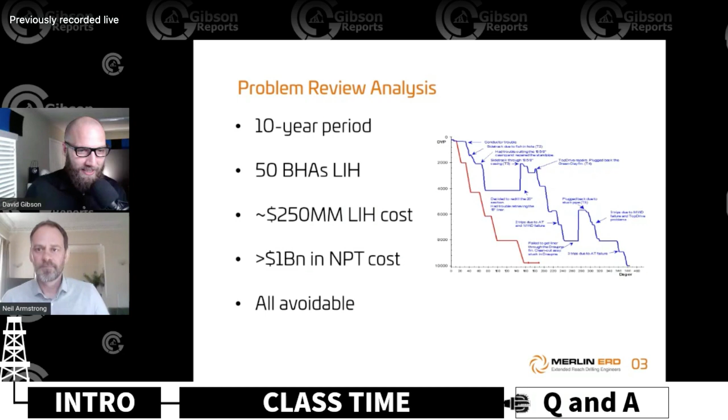Okay, so like I said, this is not an ERD presentation. However, I always feel the need to put a nose plot in all of my presentations, it's kind of tradition. But the point of this is to illustrate what's possible, because I'm going to spend the next 30 minutes talking about when things go wrong, so I'll just spend a couple minutes talking about when things go right.

10 out of the 10 longest wells in the world by measured depth have been drilled by one operator, not all in the same location, but 10 out of the 10 longest wells. One of them, which was a world record at the time back in 2012, was drilled with less than 1% NPT. It was drilled and completed in 60 days, out to 42,000 feet. All 10 of those wells are greater than 40,000 feet measured depth. So it is possible, and these are complex wells, with completions running screens out to 40,000 feet plus. So pretty complex wells. If you get it right, that's what's possible. And the success there is due to building on lessons learned and resourcing a team appropriately. They've got the equipment they need, the personnel they need, but building on lessons learned is the key thing.

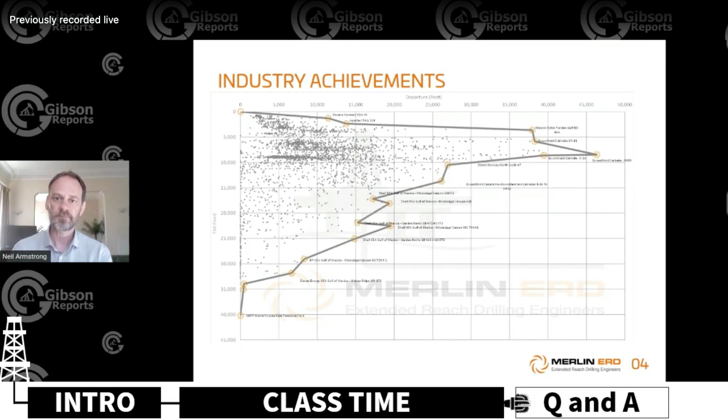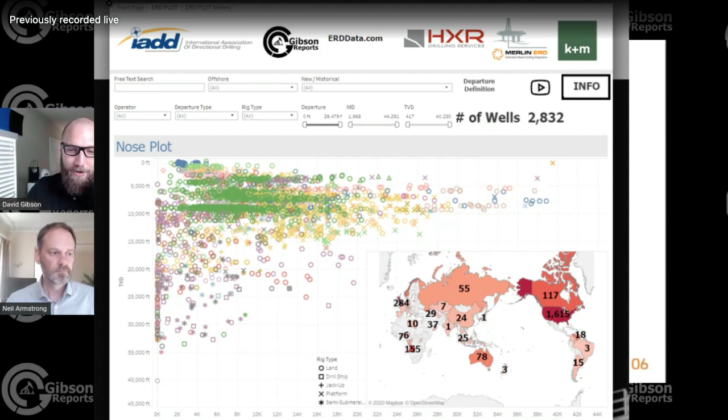There we go, great, thanks David. So that's looking pretty stable now. So let's see if it matches reality.

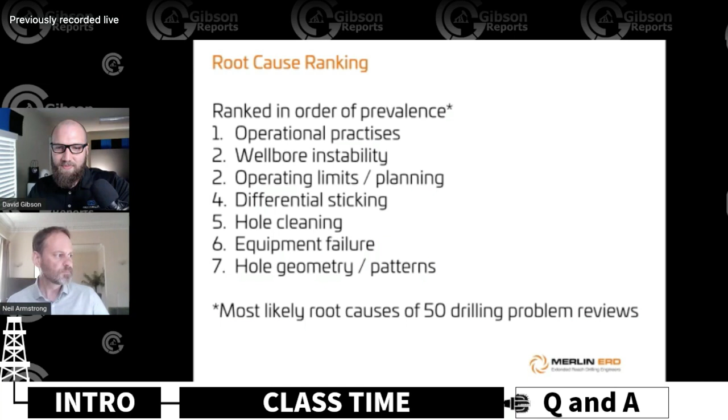Operational practices, wellbore stability, hole cleaning is a little bit higher than what we found, wellbore stability up there. And then the bottom couple, hole geometry, patterns, and equipment failure are the bottom two. So people are broadly in the ballpark there.

Quite close. So the next slide kind of shows the problem pie, how was it split up. About 29% of it was related to operational practices, and then pretty close behind, pretty much equal, wellbore stability, and then operating limits and planning and differential sticking, 17 and 15%. So there's not much in it, but regardless of how it's split, the top four were pretty clear.

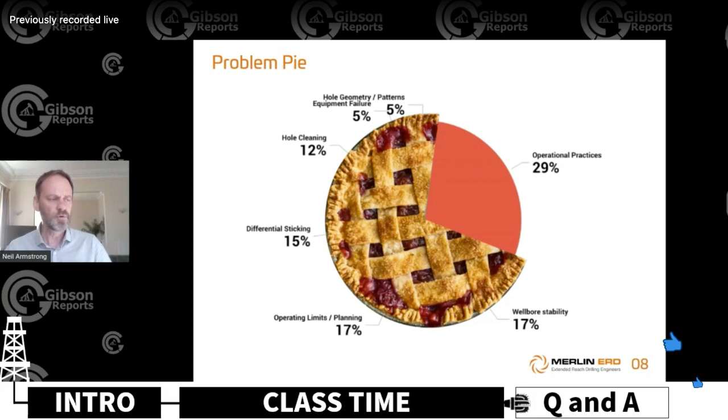So we'll go through each of these in a little bit of detail, starting with operational practices. This is top of the list because high-risk operational practices are a causal factor in many events. If you think about it, if hole cleaning's poor but your operational practices are very good, you can sometimes get away with it. If your operational practices are high risk, then you're at risk of planting a BHA.

When I'm talking about high-risk operational practices, these range from excessive stationary time on connections across a permeable zone, and it's pretty obvious what's going to happen next. Or company men obsessed with tripping to the shoe as quickly as possible without pausing to think about what has to come next, so at best he's running the same BHA back to bottom, or at worst he's got a challenging casing run coming up. No thought about conditioning the hole and cautiously coming out, it's about getting to that shoe as fast as possible.

But the analysis showed that back reaming was by far the highest risk operation. This is sort of the worst case scenario that occurred on a number of these events, whereby it was tripping out the hole, BHA pulled tight into a cuttings bed, and then pumps were just brought up and the rotary immediately went into back reaming. So that's kind of your recipe for a pack-off event, and if you're unlucky, a planted BHA.

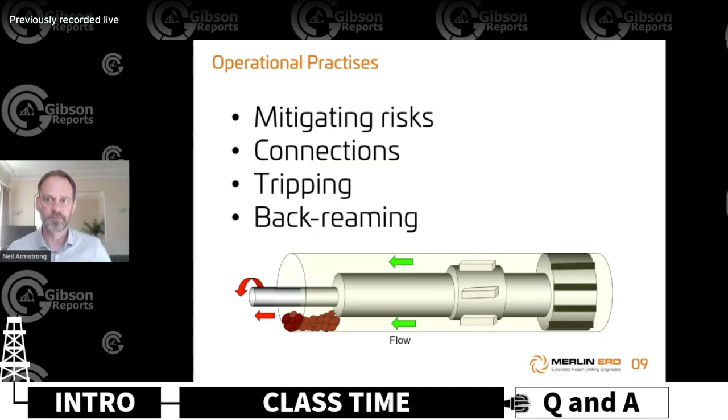But if you're getting a wellbore stability study done, chances are you know you're going to be needing oil-based mud, so the recommendation is invariably a mud weight. And often the problems we see are stability related, purely due to inadequate mud weight, and it's often just a conservative approach to managing losses. So operators are prioritizing losses over wellbore instability, and sometimes it's because fracture gradient data is inadequate.

We do occasionally see some fairly outlandish practices whereby mud weights run as low as possible to prevent invasion into fissile, pre-fractured shales. Clearly it's beneficial to avoid mud invasion into these shales, but running mud weight as low as possible doesn't help stability. Appropriate use of bridging solids is the strategy for that. That's probably one of the oddest things we've seen recently.

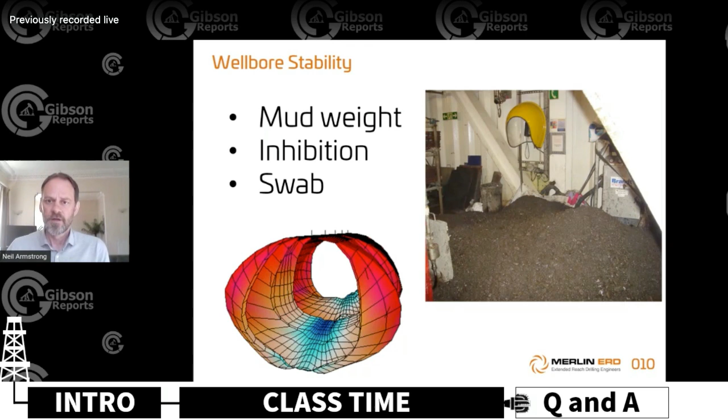A next pretty common problem we see is operating limits and poor planning from a limits and loads perspective. On high angle wells, it's critical to know what your limits are and what your loads are as accurately as possible. That involves modeling. It's surprising how often we see at the rig site drillers unaware of what their pull limits are.

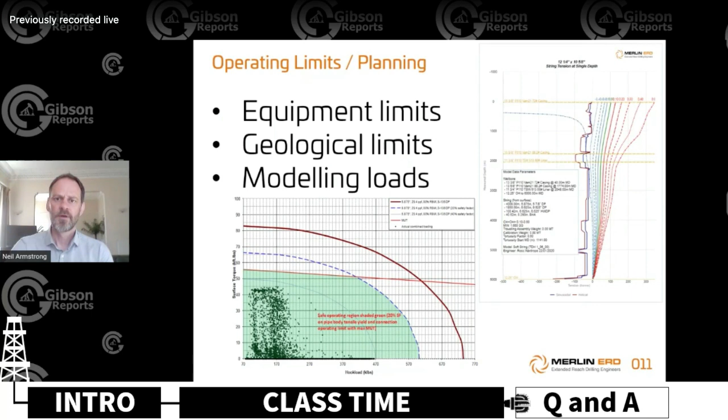Okay, so back to differential sticking. I was saying it's probably disproportionately represented in our data set because one operator had 4 lost BHAs due to differential sticking, and 7 events, but managed to recover from 3 of them. Interestingly, the difference between a $20 million NPT event - 1 lost BHA, plugging back in high angle hole, sidetracking and re-drilling, all coming to $20 million NPT - and just one line item on the daily drilling report which said 'pulled 90K over after the connection to free pipe, then reamed stand, drilled ahead and reamed stand to condition filter cake, no further problems after that' - the difference was just recognition and response to differential sticking.

Differential sticking is actually a fairly easy sticking mechanism to identify. It's the only sticking mechanism you get after a period of stationary pipe, with no movement in any direction - you can't turn the pipe, pick up, or slack off, but you've got full circulation with no restrictions to flow, so no standpipe pressure change. So it's fairly easy to identify. Providing you know your operating limits for your drill pipe, you should be able to respond quickly and aggressively to get free. The driller's always got to have in his head that when stationary over a permeable zone, he is getting stuck - it's just a question of how stuck. The more surface contact area you've got, the faster you're going to get stuck.

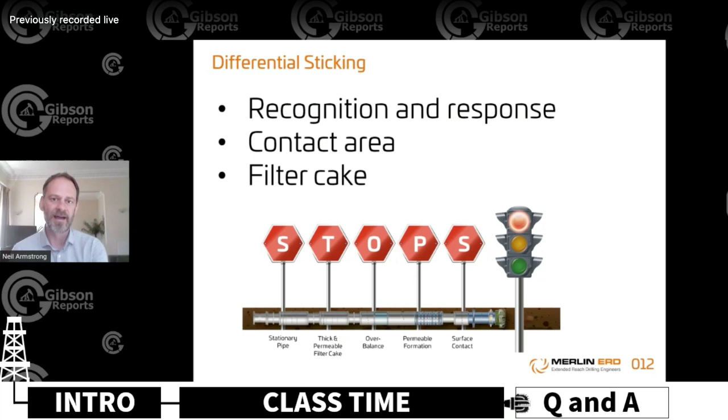So what was next? Hole cleaning. A lot of hole cleaning problems are caused by hole enlargement, generated by borehole instability.

A lot of problems we see are also caused by tool limits, so rotary speed limits, often motors with unnecessarily high bends on them, and unnecessarily conservative rotary speed limits being used. There's often a limit for when you're in the tangent, a limit for in the curve, a limit for on bottom and off bottom, and often the most conservative of those is used for the entire section you're drilling.

For hole cleaning, it's all about the system. It's the whole system - your rotary speed, your rheology, and your annular velocity, and how it all works together. And time as well, investing the time at the end at TD to clean up before you trip.

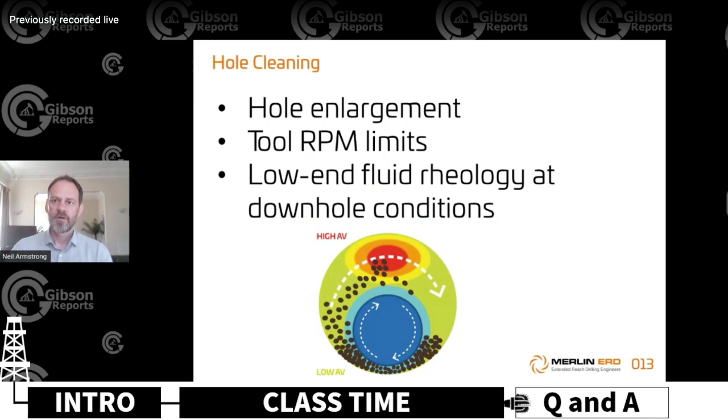Equipment failure - like I said, we don't see that many equipment failure issues leading directly to stuck pipe events. There may be others, there may be more in the industry that we just don't see. But the ones we have seen are related to drill pipe. We can't really overstate the importance of QA, QC of equipment on long, challenging wells, particularly drill pipe.

Also preemptive maintenance prior to critical hole sections on some of the key equipment, particularly the pumps and the top drive. Some of the stuck pipe events we've seen related to equipment failure have been pumping equipment going down - pumps going down and drilling ahead with inadequate flow rates for hole cleaning. And then also top drives leaking, wash pipes leaking, and then you're stuck in open hole with the inability to rotate or circulate.

And if you've been drilling at a high rate and you've got a high cuttings bed, then you might not be able to get to the shoe to fix your top drive, and then you're in open hole trying to sort that out. Not a good situation to be in.

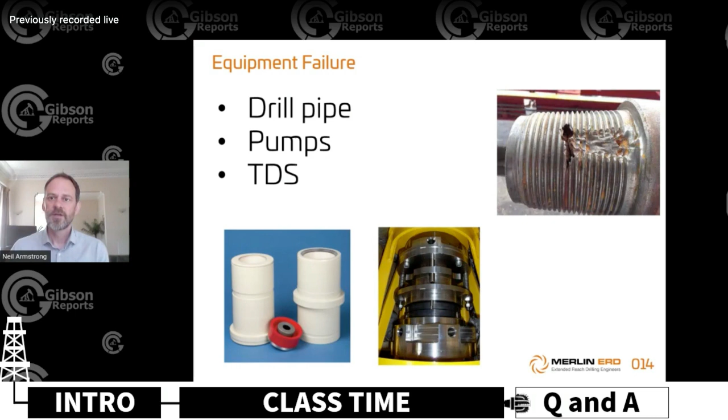I think finally, this is kind of the last one on the list - hole geometry and patterns causing stuck pipe events. Sometimes when we put this down as a root cause of a stuck pipe event, people question it like it's some sort of voodoo, as if it's some really unusual, unique situation.

But in pretty much every section we drill, at some point we're drilling some sort of whirl-induced pattern in the well. In some formations, that pattern will cause you an issue and it'll stay. If you're in some softer formations, then as soon as you pick up off bottom and get stabilizers over it, it'll clean off the pattern - it might not cause you an issue.

But basically, when we're talking about whirl-induced patterns, whirl is best thought of like a sine wave that starts in the BHA. It develops in the BHA, and when the string's rotated, the bit's part of that sine wave, so the bit is being moved laterally as part of the sine wave. So all bits are affected by whirl, regardless of what the LWD tools say. The LWD tools tell us what vibrations are doing in the BHA - we have to look at the MSE, the mechanical specific energy, to tell us what the vibrations are doing at the bit.

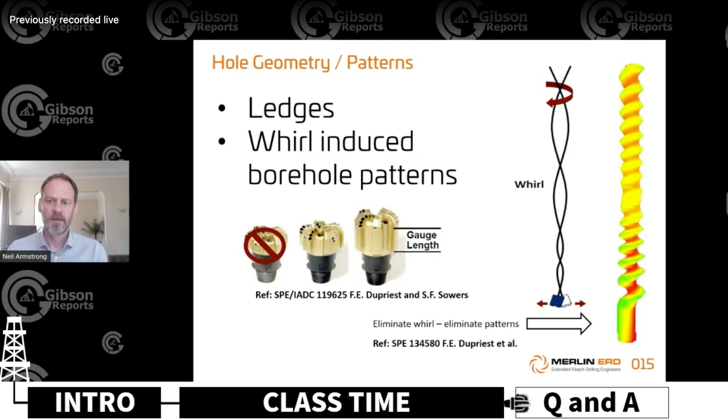So I think that brings me to the end. I'll be happy to take any questions though. I think we've got still about 10, 15 minutes left. Oh, we've got all the time in the world. I don't have to go anywhere. So I don't know, you might have a job to do, but I sure don't.